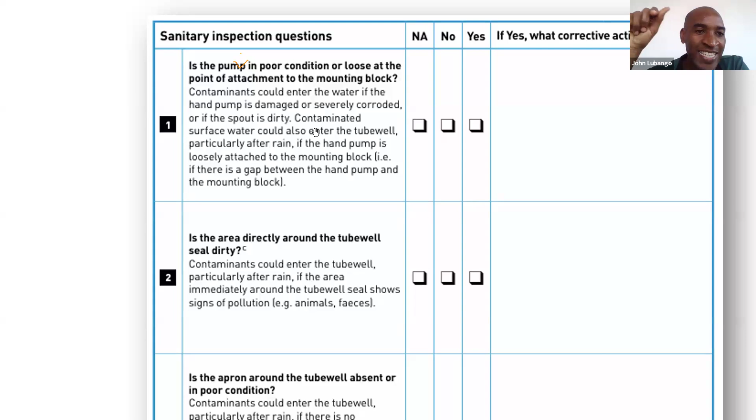Yes, Tom. Tom, there is a question again from January. He is asking, for example, you go to point number 1. Maybe you are checking if the pump is in poor condition or loose at the point of attachment to the mounting block. You find this part is not there. This part number 1 is not there in the infrastructure that you are inspecting, where you are conducting the sanitary inspection. But there is something else. What do you do?

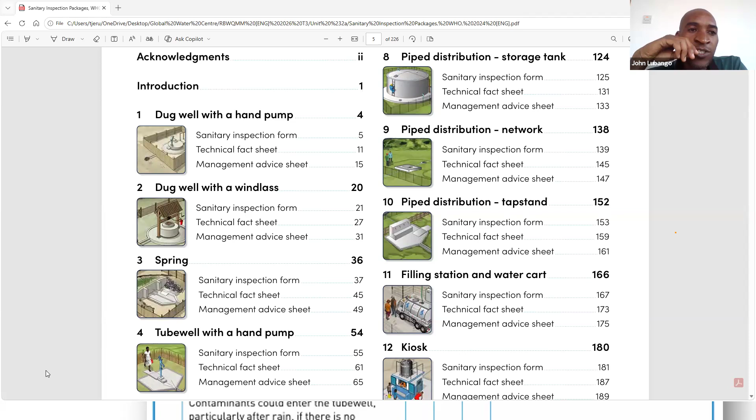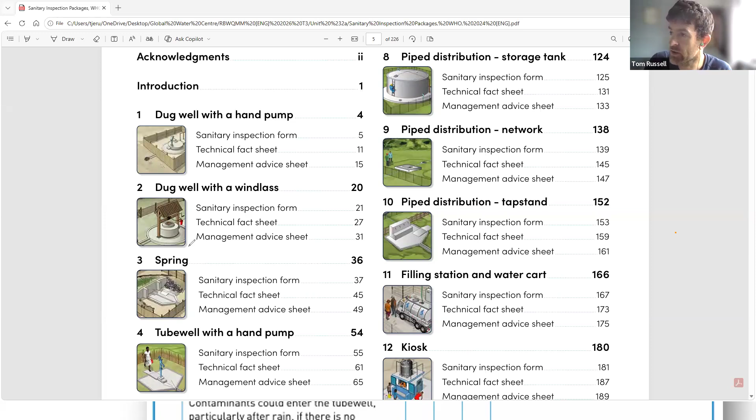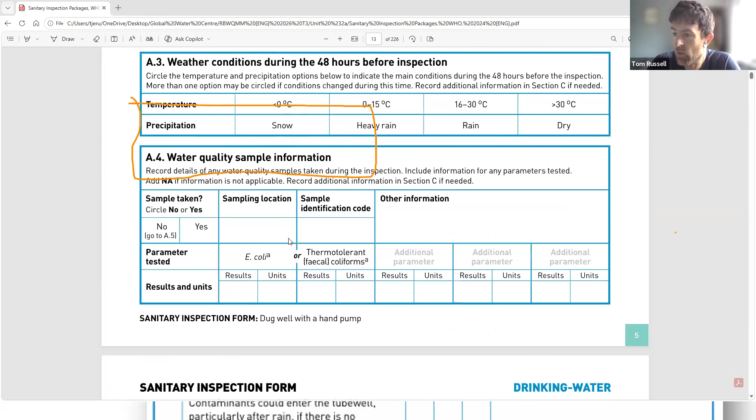Yes, I think I understand. You understand now? I think so, John. What we're saying is this inspection form package has 13 different infrastructures. It may not have every infrastructure that we have in our context. Let me look at an example, dug well with a hand pump. When we click on it here, we might realize that doesn't look anything like the pumps that we have. Or when we look through the form, we might think these questions here are not relevant to us, it's not fitted in that way, there is no inspection hatch. So when it comes to making adaptations, we can change the description here to match our context, as long as we don't remove any meaning or any of these issues, which we want to make sure we cover all of these. But if we feel this is confusing for people that are working, we can adapt the descriptions to match the context where we're working. John, is that a fair response?

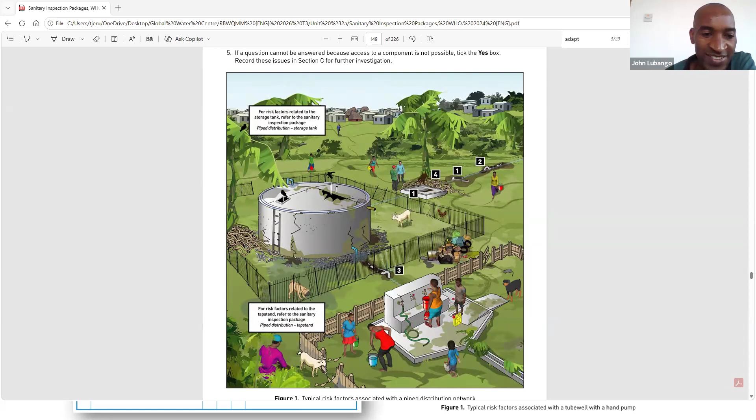Halafu vingine vinaweza vikabaki kama vilivyo. Yeah, I think umeielewa vizuri eh? Yeah, thank you bro. Okay. Understood. Yeah, it is clear now, we can proceed. Kuna mtu mwingine mwenye swali? No, we can proceed now, Tom. Great, thank you so much.

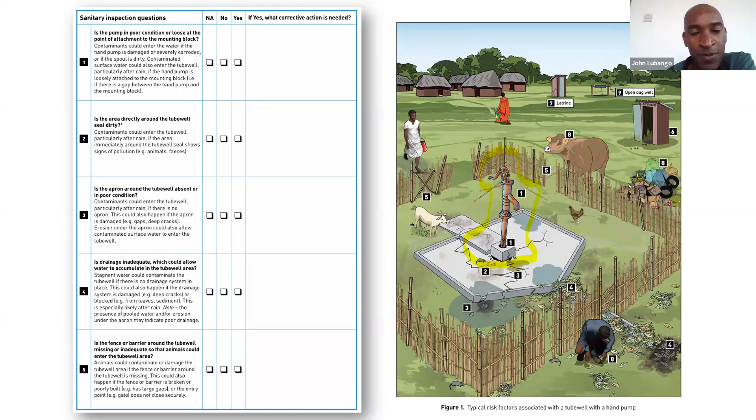It's very important to think about what do we mean by adaptation, what we can adapt, and what we should not adapt. And thank you, Martin. I think, have you taken that description from the package document itself? January, umepata hayo maelezo kutoka kwenye document? Yes, this is from WHO drinking water quality. So I just put the word adapt into the document to see where it appeared, and I think this is what you are referring to as well. For further information, see, which I think you've just picked out. Thank you so much. So we will make sure those resources are available.

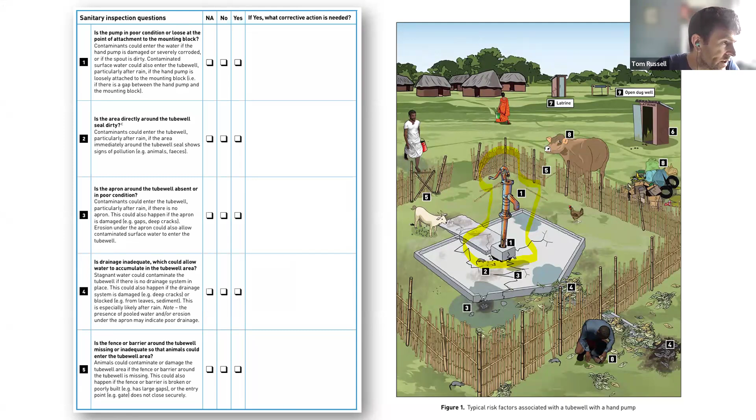Great. So in today's session, that was one element that we were looking at, one part we were looking at. And I was going to ask you in a poll, but don't have the poll working. So if you can respond in the chat, giving us one of these options. Think about, you have a project, a program for doing sanitary inspections, many different sanitary inspections that you need to do, that you're planning to do at different sites over many areas. What challenges do you think are the most difficult to deal with? And John, if you want to provide any translation to clarify this, please do.

And then type in the chat, if you think it's about adapting forms, if what we're discussing just now is the hardest thing to do, or is it about ensuring we have consistent risk factor identification, so consistent interpretation of risk, or is it maintaining adequate human resources, or is it effectively managing the budget that is available? So type in the chat which of these you think is the biggest challenge, the most difficult to deal with in your context, A, B, C, or D. And then John, if you want to clarify any translation, please do.

Unmute. Tuko na swali, thank you Tom. Hili swali, tukibakia tu kwenye ule mfano kama tuliotoka kuzungumzia, linauliza kwamba

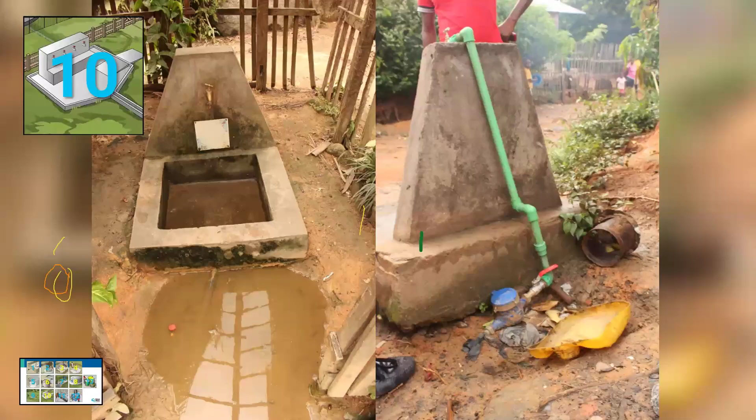You will have to try to identify where the contamination has occurred, maybe at the tap stand or at the source. You can do a physical visit to different components of the project and check the situation. If, for instance, a tap stand is in the middle of the village and it's surrounded by latrines, you can decide to check that point because the situation physically seems not good.

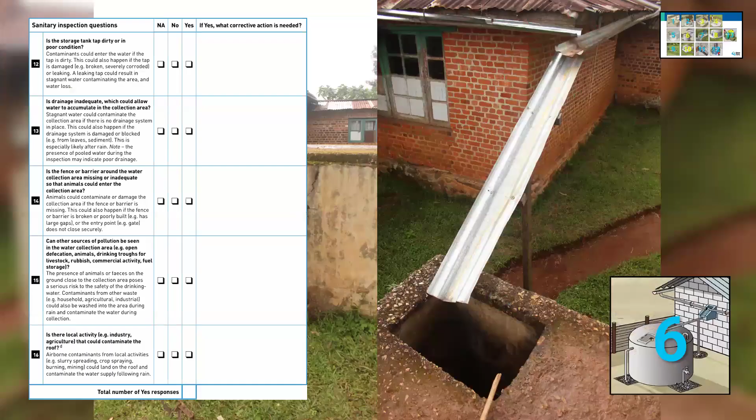So you can decide to do inspection at that point, or go to the source and check it based on the condition, then decide to dig deeper using the sanitary inspection form to understand the exact point. You sample the places and then conduct the sanitary inspection. That is my contribution.

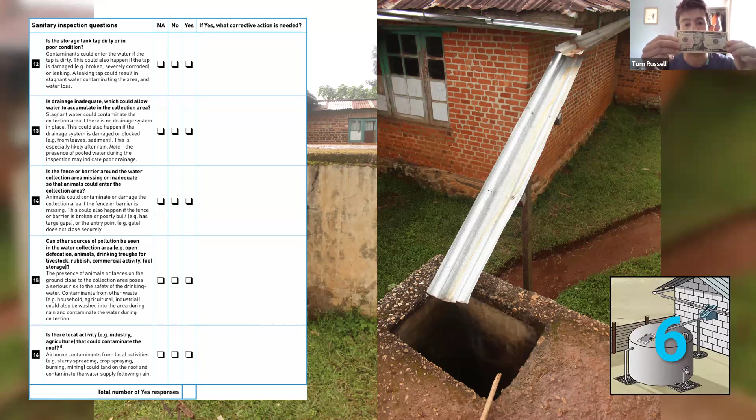Thank you, Martin, that is really helpful. So it's kind of like, going back to my dollar example, my budget was $40 for 12 months. What if I explain to the team organizing the budget that the $10 we had planned for the first month or first 3 months, I need $20 - I need to double that, because like Martin says, I don't know where to prioritize yet.

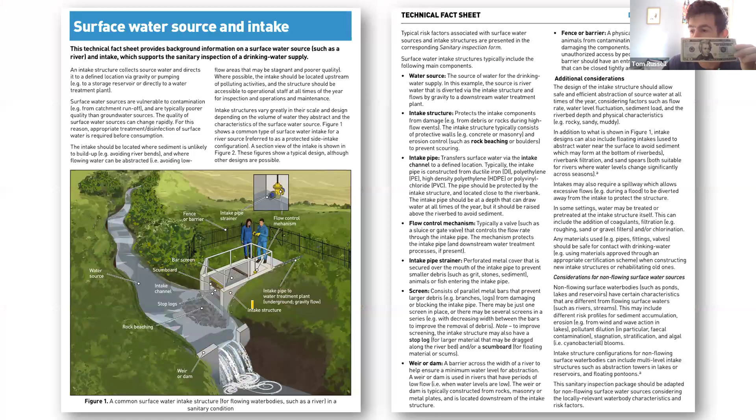I need to do a full assessment first, maybe done rapidly, not as thoroughly. Once I've got an appreciation of where the highest risks are - like you were saying, Martin, a source, this tap stand - if there's an issue at the source, that will affect a whole community. So maybe you decide the river intake, the source, is a priority for me, and that first month we are more thorough and build up a picture of where those high risk areas are before continuing with our $10 every 3 months once we know how we've prioritized.

What do other people think to this idea? John, would you like to add anything? What do people think? How would you go about prioritizing sites for doing sanitary inspections?

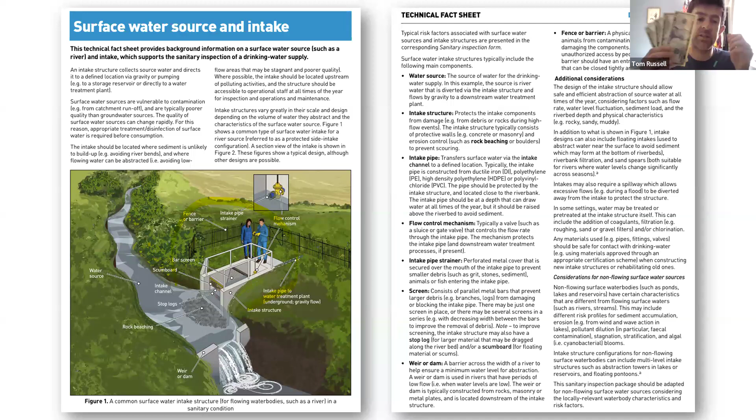Yes, it is a most tricky question to tackle. Great question. Because you have a very limited budget and a number of sites that need sanitary inspection - $40 in your case, and $10 to do sanitary inspection every 3 months for 12 months.

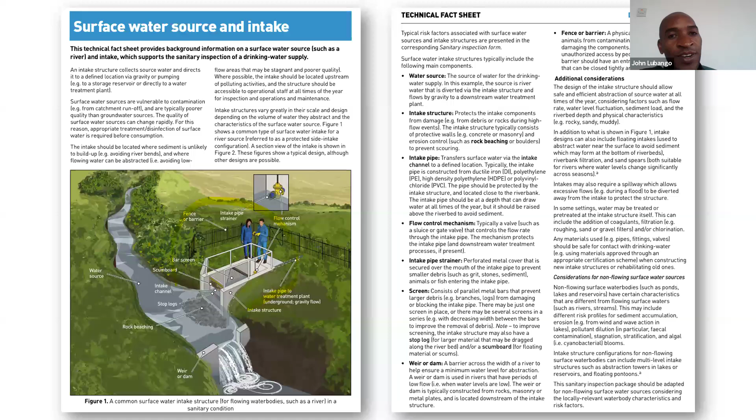It is an issue, as Martin said, that you need to prioritize. You go for the high risk area, where you feel there is more need for sanitary inspection, based on current issues - if there is an eruption of waterborne diseases, you start with those. So you link them in terms of demand - where there is the highest demand for sanitary inspection, that is where you concentrate first with your budget.

Exactly, thank you John. I'm gonna move us on. I hope that's helpful. If you don't agree, type in the chat or raise your hand. If you do agree, type in the chat and let us know what you think. January, you want to raise your hand, you want to jump in, please do.

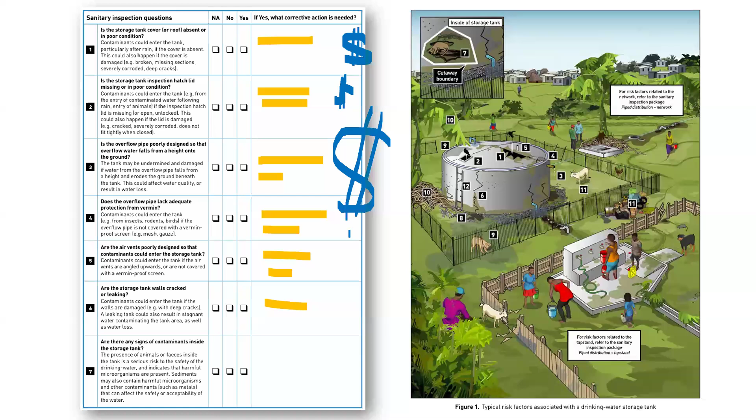Tuna spanner za kukaza ambazo ni compatible na nati ambazo ziko pale. Je, mtu wa kukaza ni nani? Ni technician, yuko wapi? Kuna usafiri wa kumpeleka au la? Kwa hiyo lengo la hii kwanza ni ku-identify tatizo. Ndio maana kama ukisema yes kuna tatizo, you have to suggest the action that you think may fix that issue and prevent contamination.

So I think we are kind of mixing things. It's not like the budget that we have been discussing is the budget to resolve the issue - it's the budget to conduct the sanitary inspection, and not retrofitting the issue that is there, because you cannot do a budget if you don't understand the problem, how big is that, etc. I think yes, maybe.

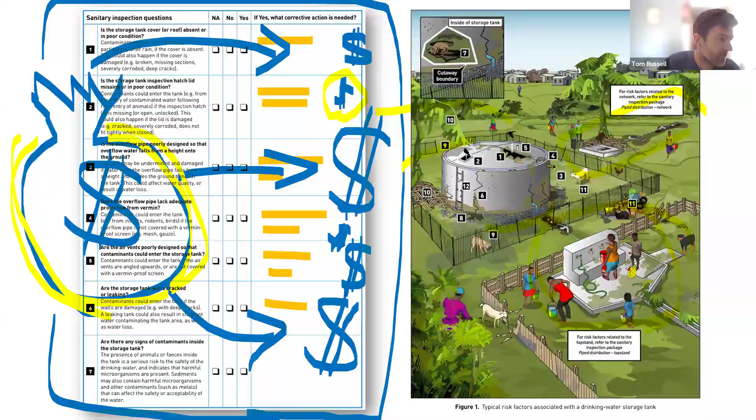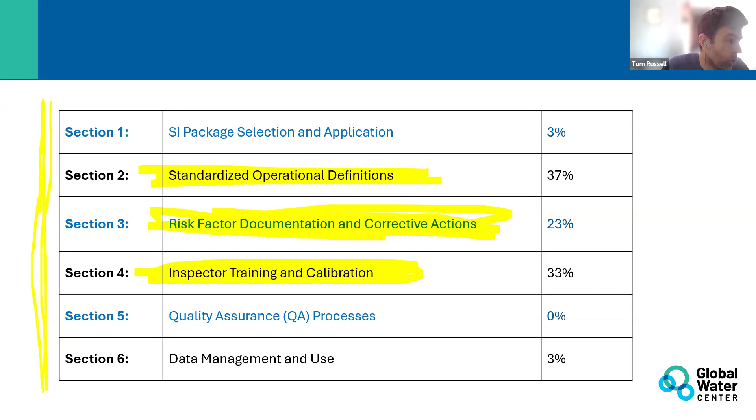We're wrapping up now, but if you've got any questions, I want to make sure there's time for questions. John, you can lead that in Swahili. Just as a reminder of where we're at - we're in week 3. Next week, we'll encourage you to look at water quality testing. We'll have a live session again on Thursday. But any questions you have from today's session about the course in general, please go ahead. John, feel free to lead this in Swahili.